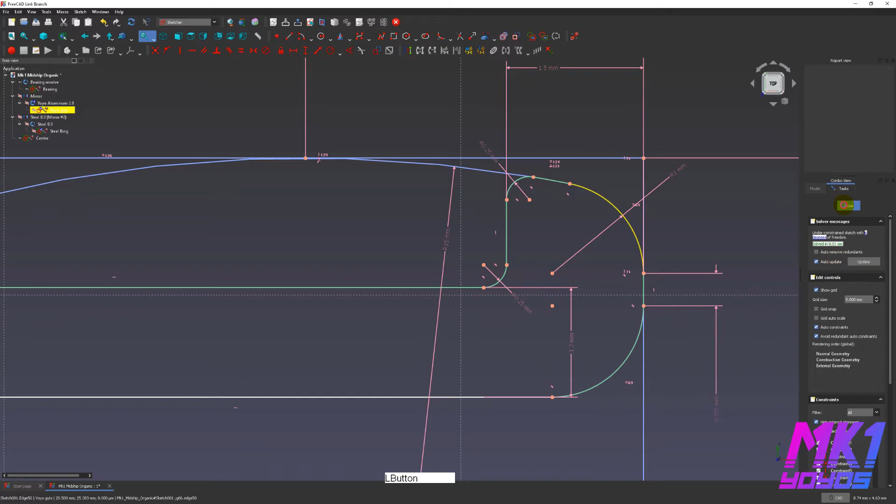In this video we're going to clean up the CAD file and export it for prototyping. So I got a tip from Zach Lerner about something that I want to update right here in that corner in the CAD file. And what he said is to use a chamfer on the steel ring in that corner. So I'm going to update that real quick.

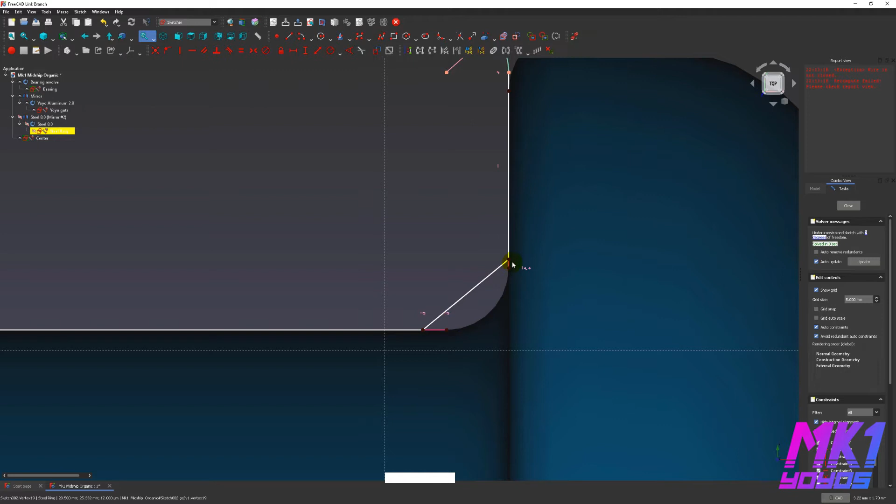I've deleted the fillet and I'm going to redraw that with just a straight line, making sure those are still constrained along the horizontal and vertical constraints so that they're useful. It's at the angle 135, so it's like a 45-degree cut on the other side, and fixing the length of it will then fully constrain that steel ring.

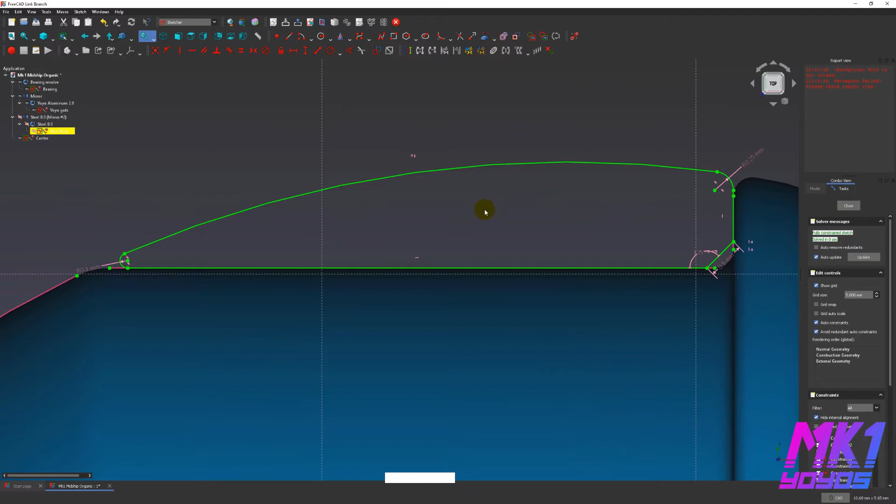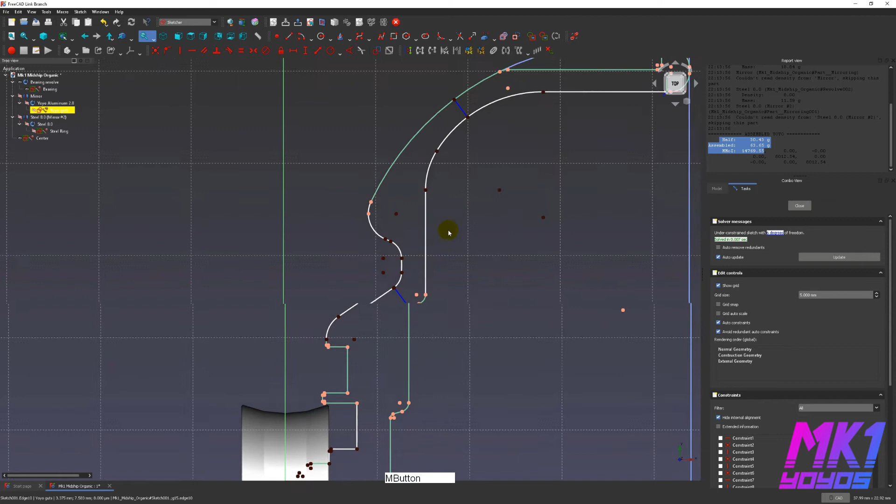So what Zach said is this makes it easier and cheaper to produce and fit the steel rings. A good machine shop will make that change for you anyways, but I would prefer to include that stuff in the file if possible. So taking a look at the final specs here, it's looking like 63 and 2/3 grams for the assembled yo-yo, using my estimate of 2.8 grams for the whole guts.

So I've zoomed in here on the bearing post actually. I want to take a look at a couple things. So this post has got a couple things going on. I've tried to get it to have a lot of thread engagement where the axle can screw into the post down along that line. So you can see there's about 3¼ millimeters currently, and I've set that as a reference constraint, so it'll update.

It's not a driving constraint, so it won't fix it to that length, but it'll tell me how long it is. And I've also added a constraint to the distance between the post and the center line. So if you double that, that'll be the distance between the two posts. That 1 millimeter section is roughly how much of the post is actually interfacing with the bearing.

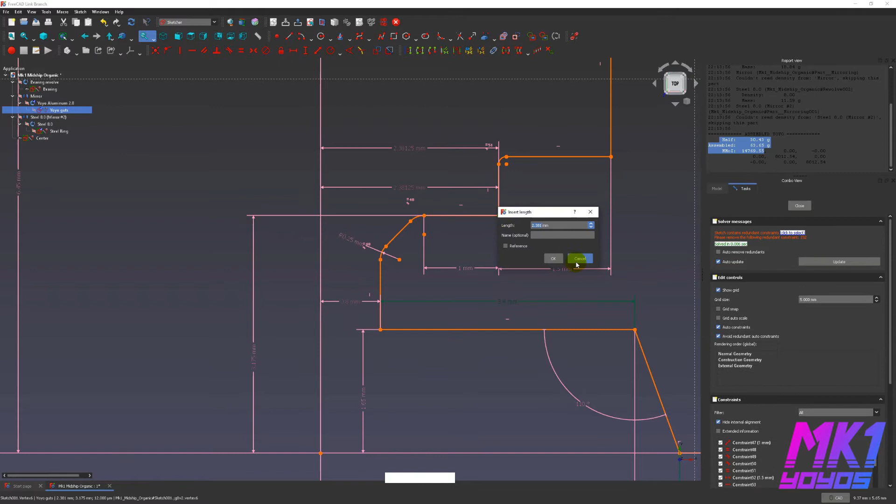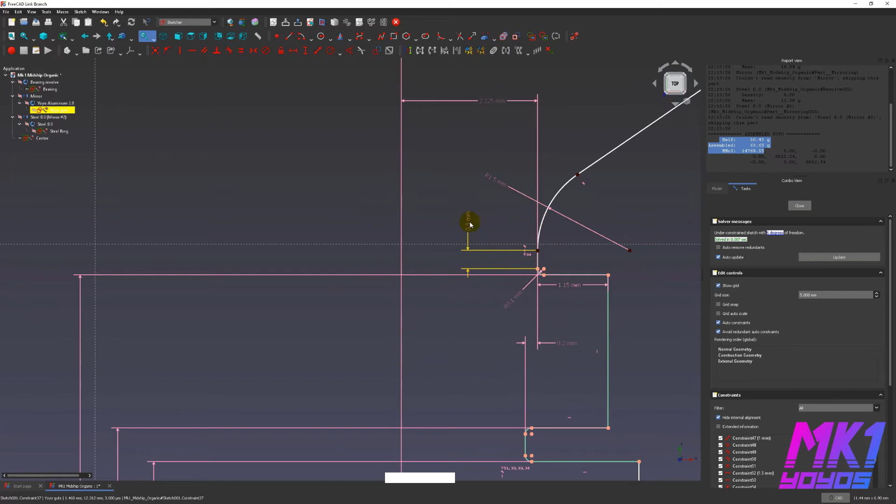If that is very long, then it becomes super difficult for the bearing to be installed or removed. If it's too short, however, then the bearing will always feel loose, and it won't help the two halves stay concentric with each other. I'm just sliding constraints around and double checking everything in here.

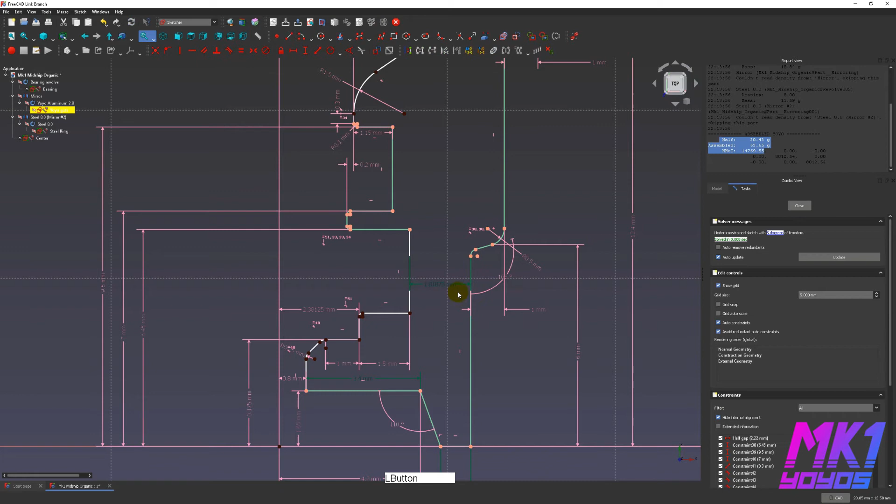So I've also decided I'm going to adjust the gap down to 4.44 millimeters, just make it a little bit smaller. Hopefully it'll help it feel better on the throw and the bind. So I'm double checking the distance between those two parts using a reference constraint, so it's not over constrained. It's very thick there.

The thickness of that section is kind of determined by the shape of the cup. And then on these other sections, like going up the body, I aimed for a minimum of 1.3 millimeters, which may be a little bit conservative for the 7075 alloy. And where the ring is fitting, it's 1.2 instead.

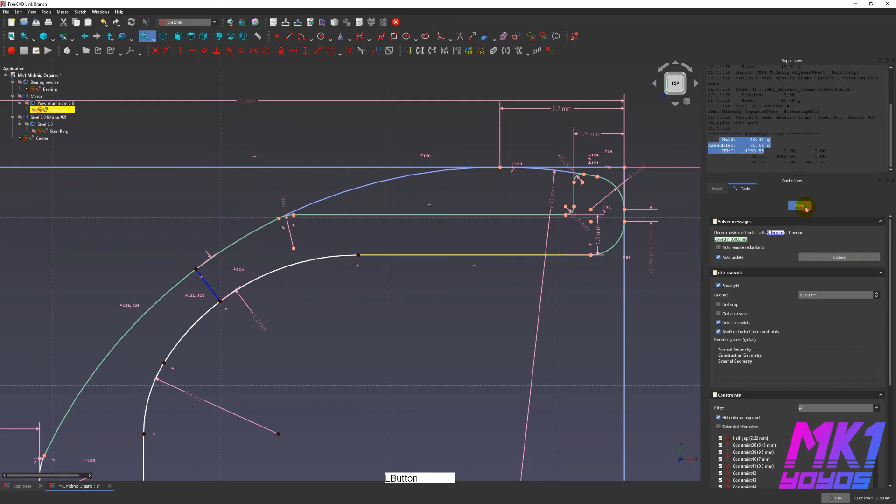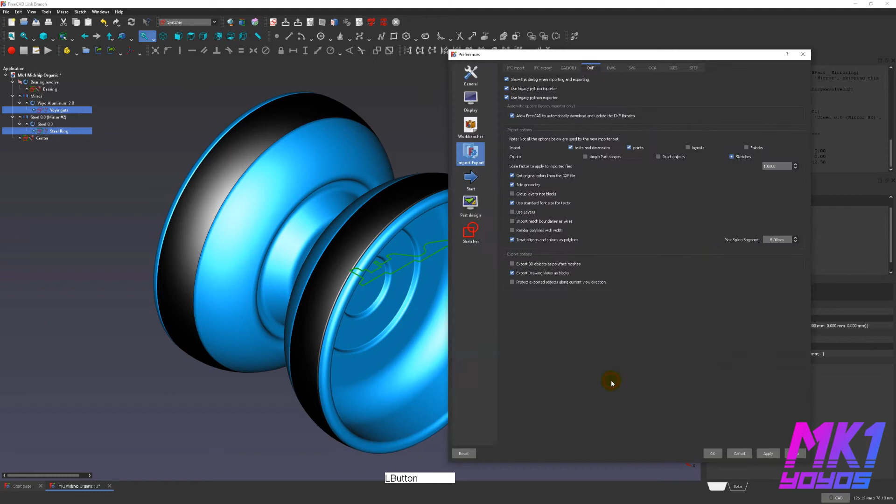But that looks good. So what I'm going to do is select both of those parts, hit Control E and export as a DXF 2D. That'll bring up the export dialog. Hit OK. And it will create a DXF file. So I'm going to double click and open that.

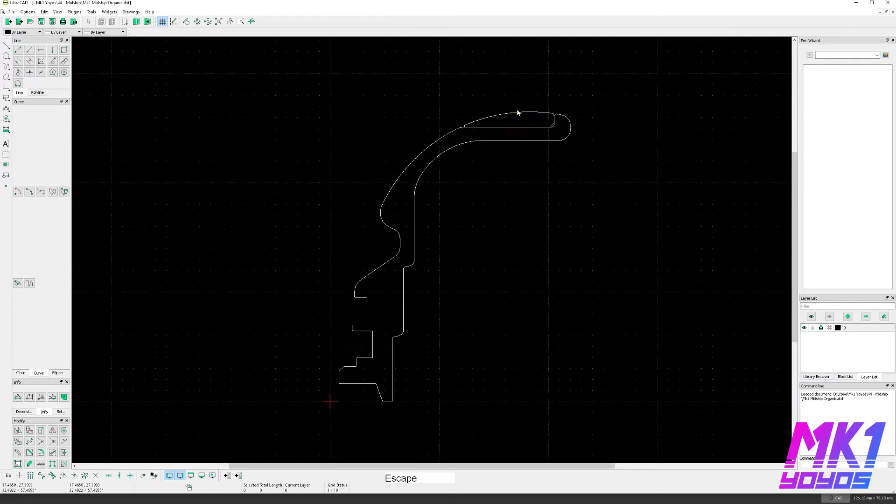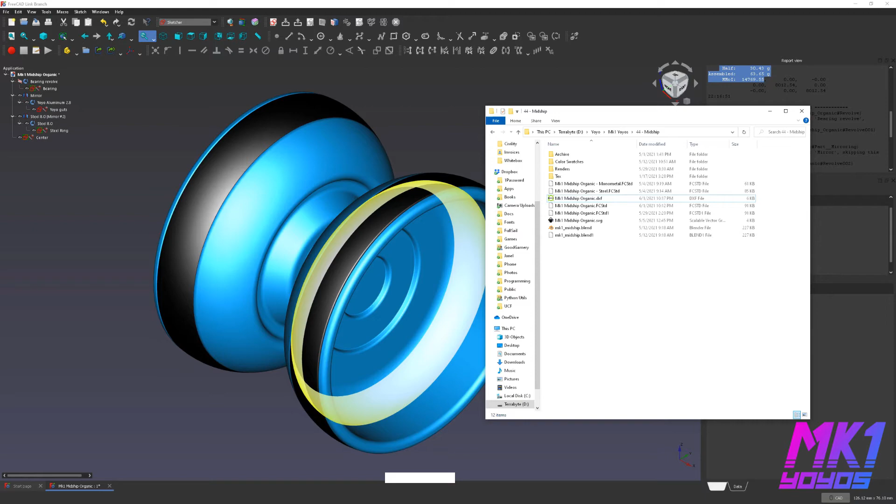I have another piece of software called LibreCAD, which is pretty much only for viewing and working with 2D CAD files. I just want to double check and make sure that the two parts are separate sections in the DXF, and I'm just looking at everything to make sure it all looks good with no discontinuities. And you can see that new chamfer on the inside of the steel ring, so that looks good. So that's ready. And the next step is to prepare notes for prototyping.

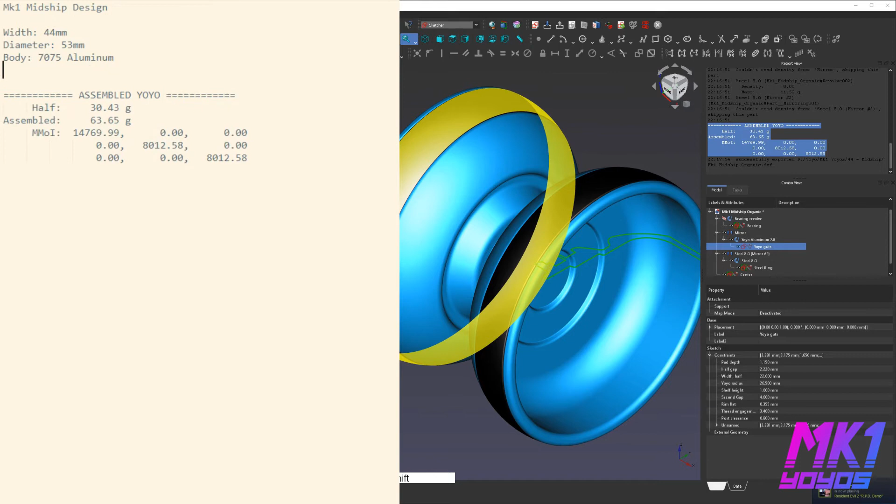So when you're preparing something for actual prototyping or production, it's a really good idea to write down all your notes in a text file, including all the specifications of the design and all of the other details that a machine shop is going to need to actually produce it. So this yo-yo is 44 millimeters wide, has a diameter of 53 millimeters. The body will be 7075 aluminum, and the rings will be stainless steel.

The axle will be an M4 axle at 8 millimeters long. And it's not always clear just from looking at the 2D CAD file how long the axle is supposed to be, unless the center point is lined up correctly. So it's important to specify. For the finish, I want a 220 grit blast on the surface and anodized.

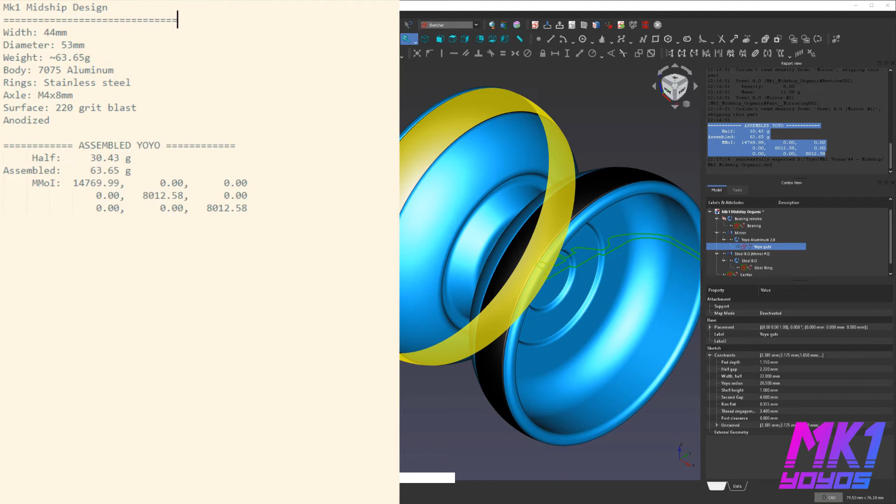We'll pick a color at some point, unless you want to order raw prototypes. I'm not really interested in raw prototypes right now because it can be a bit harder to test some parts of this yo-yo design, which is going to be good for finger spins hopefully, but not if it has a raw finish.

Yeah, so I talked to my team, and one of them had an idea for a name, the Spyglass, which fits into the optical theme of some of our yo-yos, to go along with the Diffraction and Umbra and so on. So I grabbed some telescope emojis from off screen, and there we go, Mk1 Spyglass.

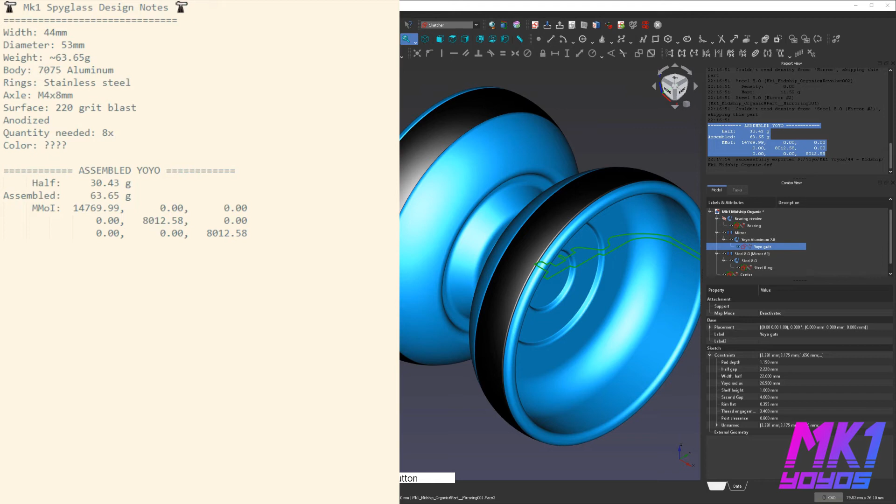So for the color and quantity, I need eight of these for me and my team, so I can send one around to everybody. Some machine shops will only really make 5 for a prototype, which is fine. If I need to do that, that's okay. But I don't really need more than 8. Then I just end up with extra ones sitting on my shelf.

So for the color, there's a couple options. I'm probably gonna go with the sort of silver with rainbow torched ring, as I'm trying out a machine shop, and I want to see how they do with that look. So it'll be easy to tell how well anodized it is with that kind of color, because you can't hide anything like with a dark dye and so on.

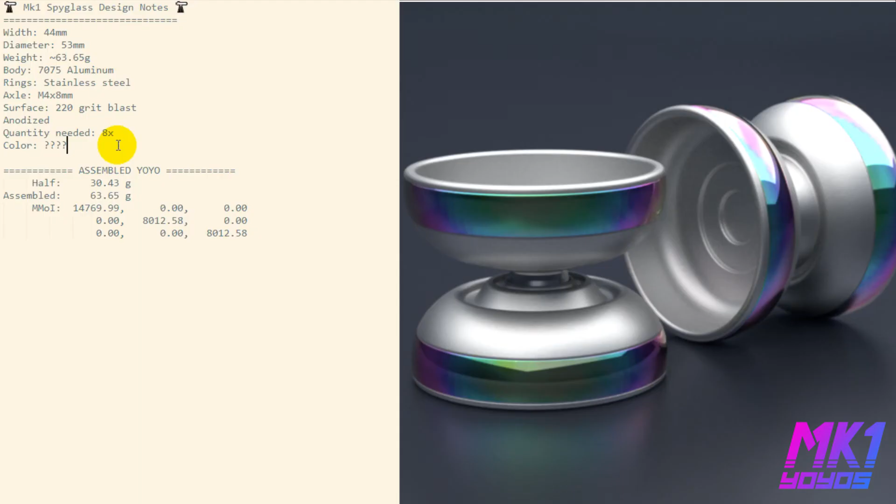And I've got the specs that I've exported from FreeCAD there for my reference. I'm not going to send those to the machine shop because those numbers don't really mean anything to them.

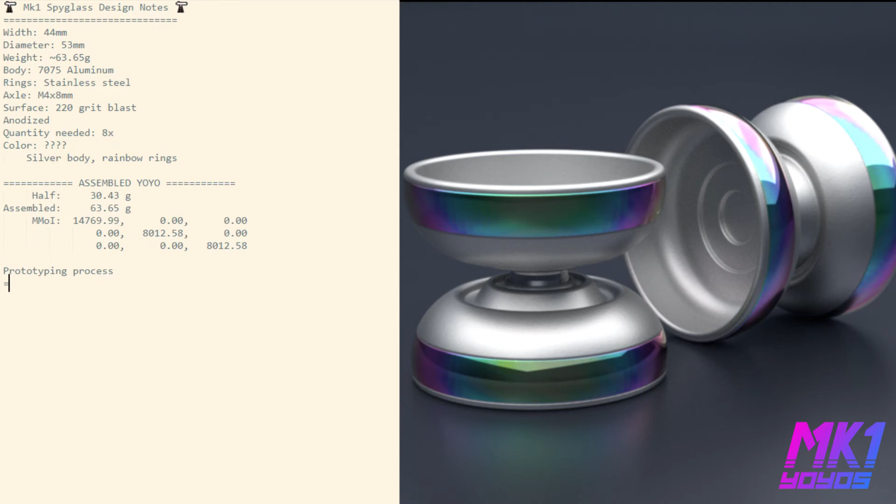So the general process for prototyping is, once you have a design that you're happy with, and you kind of have a concept for how you want to produce and market it, you need to find a machine shop that can, number one, do all the stuff that you want for the design in terms of material and construction. And for me personally, I like to use machine shops that handle the anodizing themselves.

Whether they outsource it or do it in-house doesn't matter much to me, as long as they're managing it. I don't have the time or the expertise to figure out anodization really. It's really far out of my wheelhouse. So once you have a shop in mind, or multiple shops, you can get quotes from them. Most of them have pretty standard prototyping rates, which are expensive per yo-yo, but that's just how it is. It's time consuming and annoying for them to make very small runs.

You should also ask at this point what their availability is, whether they have a lot of things that they need to do before they can produce your yo-yo. Especially if this is the only project you're working on, you might want to find a shop that can make prototypes more quickly so you can get them. If not, it's okay for you to wait, then it doesn't matter as much.

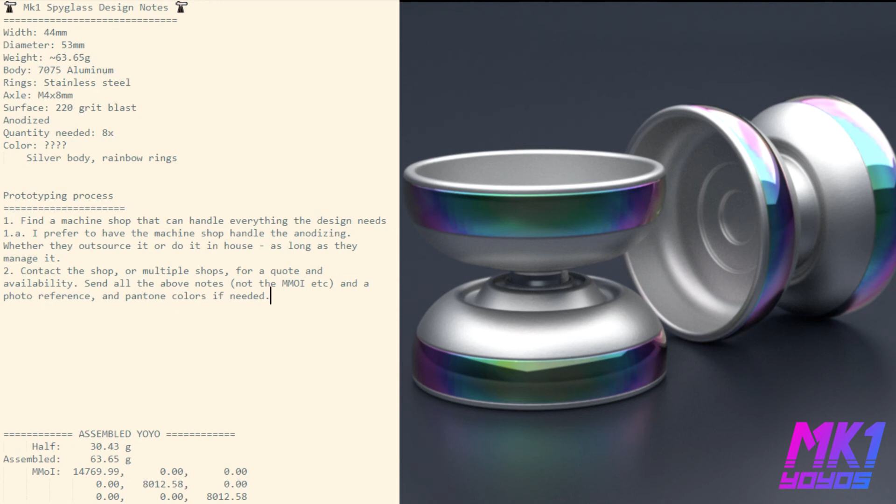So all of the notes from the list above is what I would send to the machine shop. And if you've picked a color, it's usually helpful to send a Pantone color swatch as well, so that they can compare colors more accurately. If you have any other questions for the machine shop, you should ask them ahead of time instead of after the fact, especially about things that you don't know a lot about, like what different types of surface finish options they have, like raw, polished, bead blast, a matte blast, what different amounts of blast they may have.

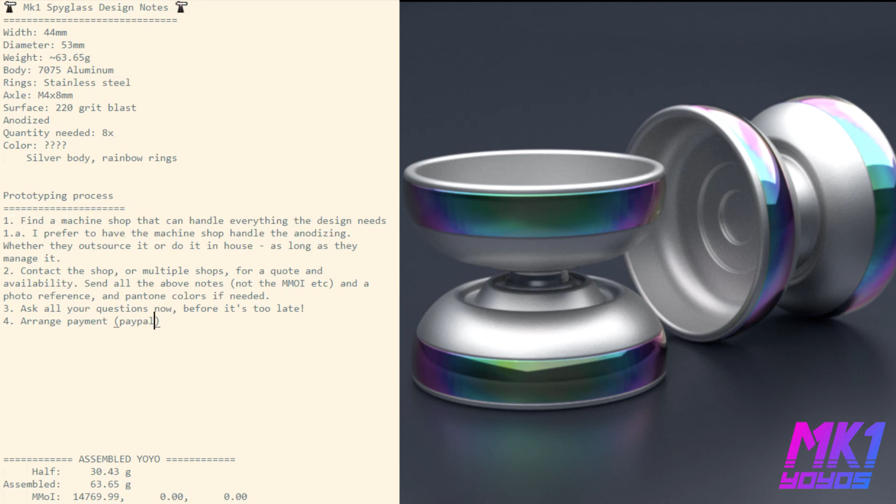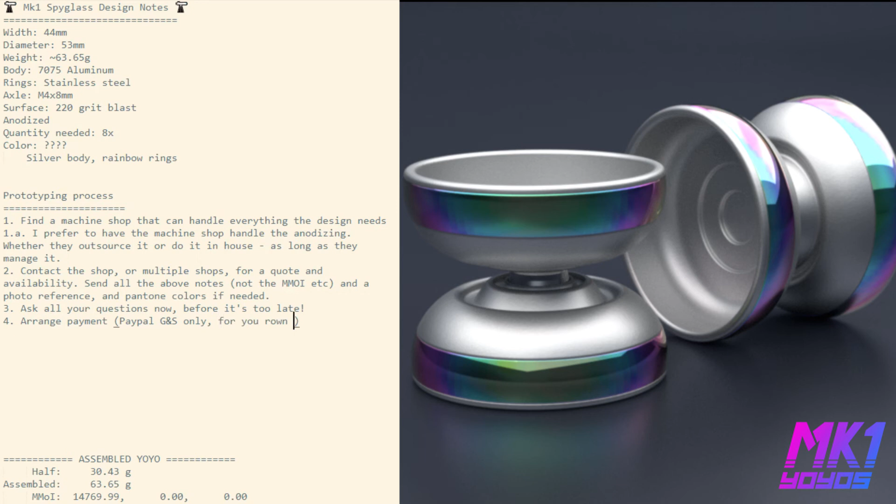And then after you've got all that sorted out and you have your quote, it'll be time to arrange payment. It might be like 50 or 60% down, or all up front, depending on which shop it is. And don't use a wire transfer. Use PayPal goods and services if at all possible, for your own safety, even if it costs you more, because you will certainly regret it if you run into a situation where you wish you had paid with PayPal goods and services. So after that, it's time to be patient.

If the machine shop is good at communicating, they'll send you details and photos along the way. It's always okay to ask for them, so that you can see how the process is going on their end. They may have like, hey, here's the yo-yos that came off the lathe. Look how shiny they are. And then the second, longer step of waiting for anodization, assembly, testing, and so on. And then they'll arrange for shipment, and eventually you'll get the yo-yos in the mail. And now the rest of the process has begun.

So once you have the yo-yos, you might have some other people you want to send them to for testing. Get out a notebook and write down all your thoughts on it, and take careful note of all the details of the yo-yo: any sharp edges, any parts that don't feel comfortable, anything that feels weird about the throw or the bind, or how the string interacts with it.